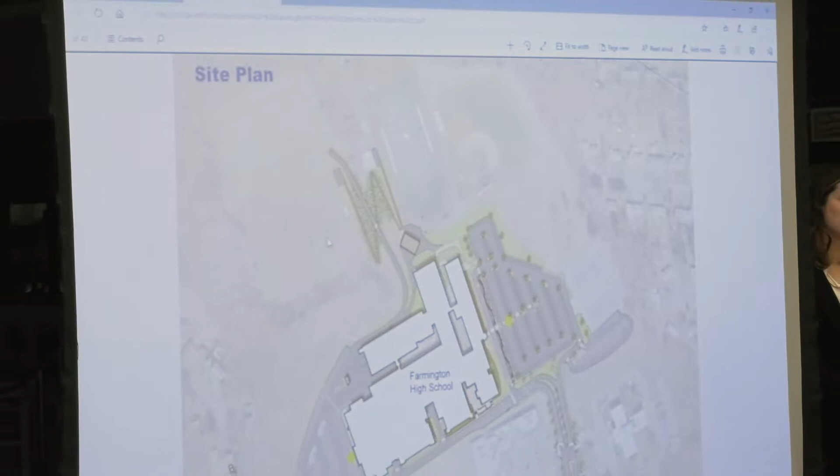So I'm going to go right into the solution. We're going to walk you through the building as we see it being resolved, and then we'll go into the criteria. Just to give everybody a sense of orientation, Route 4 is down here, Monteith Drive. This is the main parking lot, the southeast corner of the building, and that's really the parent entrance right there.

So in our option here, what we did is we said, well, one of the key factors in this design is going to be safety and security.

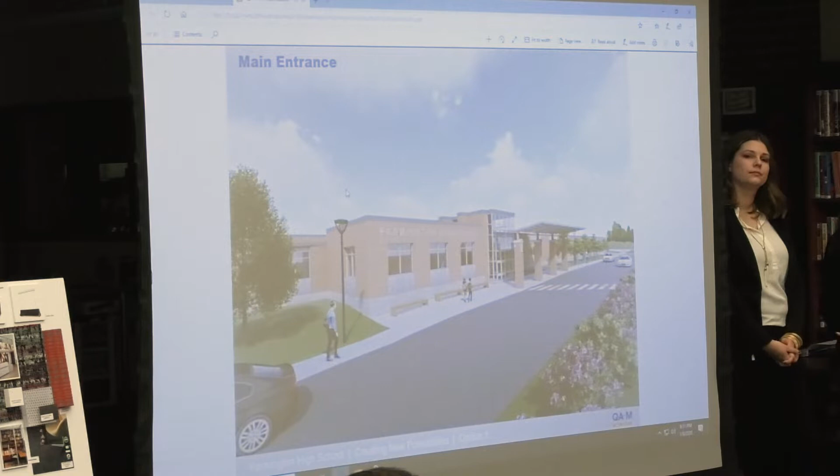Our first move here is to take that entrance, which is a parent entrance, and really make that the main entrance to the school. What I mean by that is to really enhance that space, bring the administrative offices to the front of the building there. That's the new main entrance. There'll be a secure vestibule, so everybody will come through that vestibule, monitored by the administrators. There'll be sight lines to anybody coming and approaching the building. So that's the first solution for this particular project.

So as we looked at it, we said one of our priorities has to be circulation. What can we do to simplify circulation? In this approach of making the new main entrance right here, we also opened that space up in a way that allowed us to have a lobby, and the sight lines from that lobby would carry you through a very simple circulation path that helps with wayfinding throughout this building. More so for the community than the students, because the students learn the building. It's the community that's really the one that has to worry about where they're going.

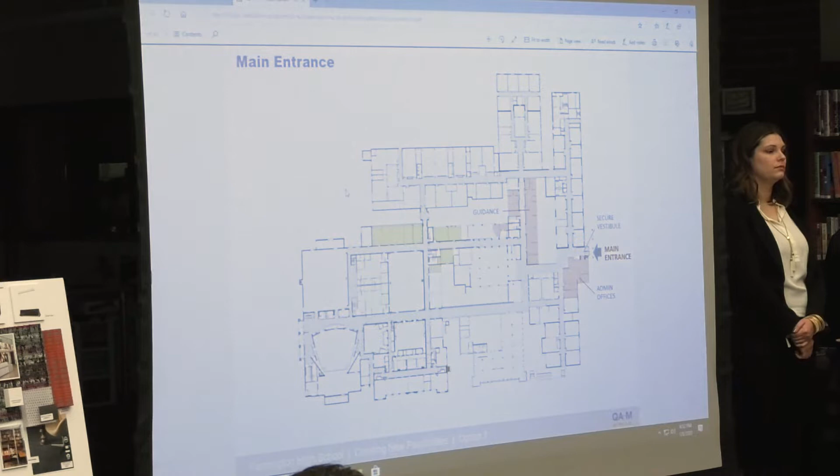So when you come in and enter the building, what you'll see from that lobby is a hallway, and where we're standing on the left side here is this space right now. Right in front of you will be the media center. So where do a lot of functions occur? In the media center. So it's important that right off from the front entrance, you look right into the media center.

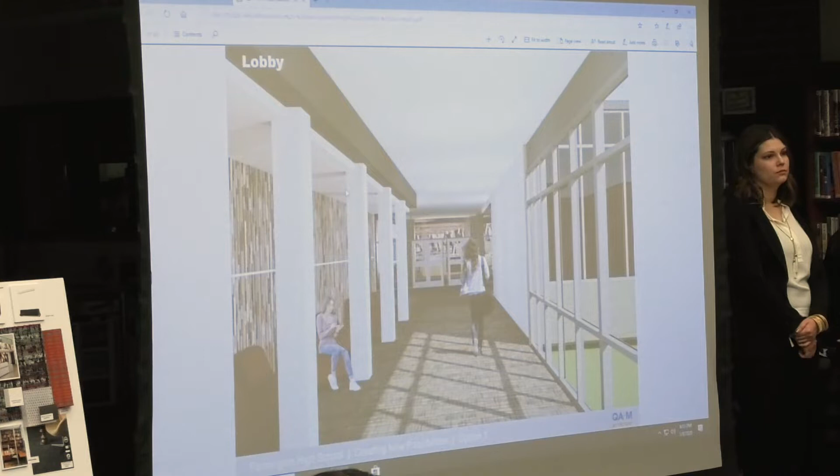Now, from a plan perspective, what you're seeing is we're standing here, looking out at the media center learning commons. One of the key criteria to this plan is addressing NEASC. And the reason I bring that up again and again is the four areas NEASC really cited us on: the adequacy of the cafeteria, the adequacy of the learning commons space, safety and security, and adequacy of science.

So what we've done in this solution is come up with a way of building a cafeteria in this courtyard, the circular drive, converting the cafeteria to the media center learning commons, and then there'll be a snowball effect of how it improves space throughout the building.

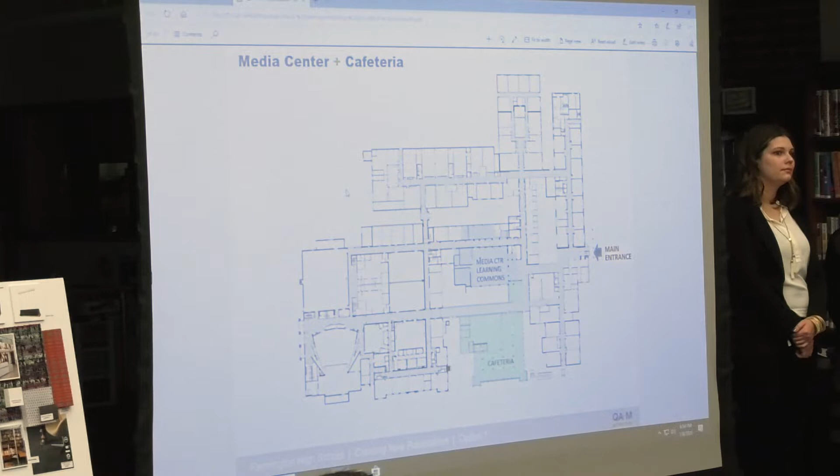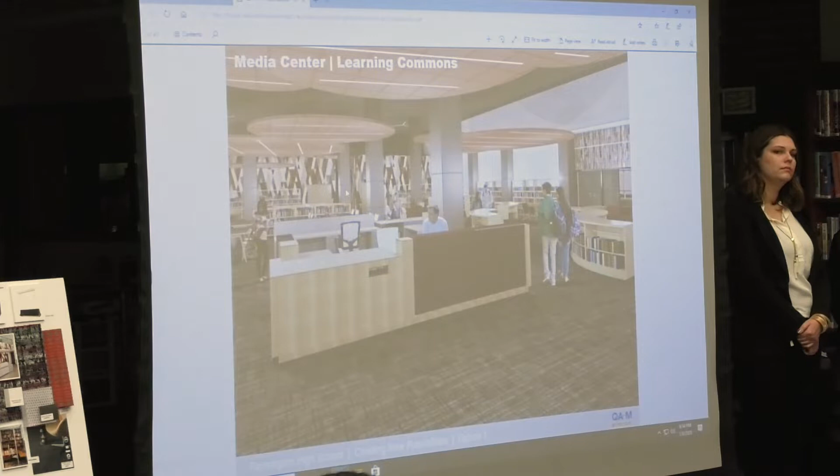Adjacent to the learning commons is the cafeteria, and the cafeteria is a space with lots of natural light. Again, it's another space that students, parents and the community can use. So it's important to have this space.

Another aspect of this particular design is that right adjacent to the cafeteria is a courtyard. So if you envision that that's the circular drive right here, that's where the cafeteria is, and this becomes an outdoor space. Typically in the summer or in the spring and fall, students are out there, so it's really an extension of the cafeteria.

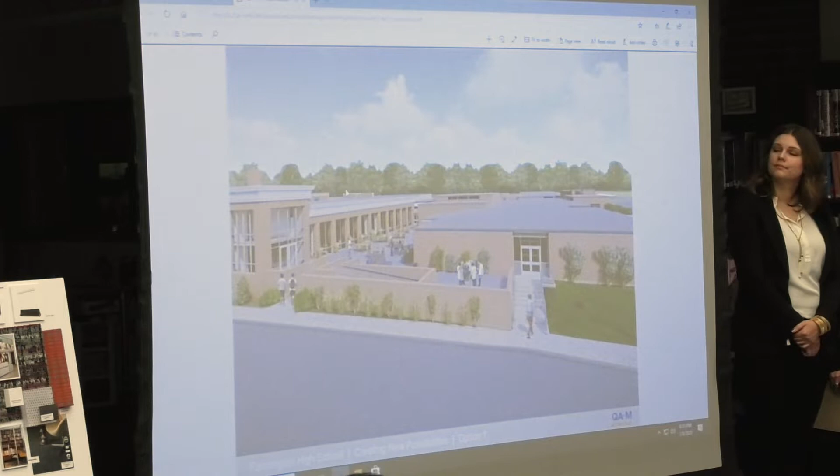And what we're doing in this process is solving a problem that says, by building one cafeteria space, we can now repurpose so many other spaces within the building to meet all our other needs, in terms of making the building fully accessible, compliant with educational needs, and so on.

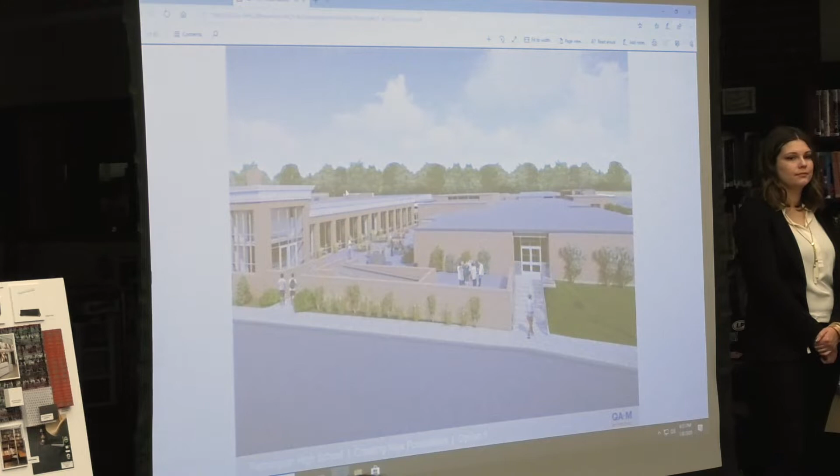So what you see here, and what I was pointing to, here's the media center. This is actually sort of a cyber cafe space, an interspace between the media center and the cafeteria. And this hallway right here is a new hallway that becomes the connector to what's existing as the main entrance right there, because you can see here's the auditorium, the gymnasium, and that becomes the main connection point right here.

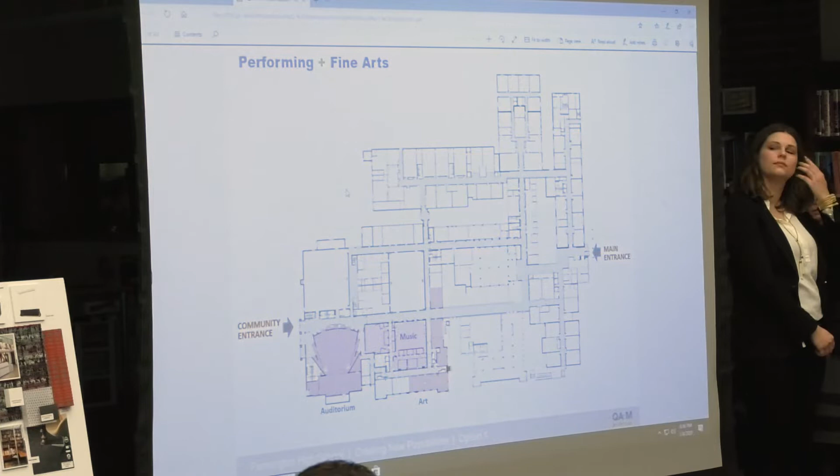So from a circulation point of view, you come into the building, one turn, and now you're right there, down Main Street, where you've got all these spaces functioning right off of that area. The other thing it does is, students cut across to get to their art classrooms, for instance, which are on the 3rd floor. They're coming all the way from the 900 wing trying to get there in that short amount of time, so they cut across. That's a security issue with students coming out. So this solution also allows for an internal connection for all students to move throughout the building.

As you go down this Main Street, you'll see there's music, there's the auditorium. One of the changes we made is we put art on the 1st floor. Looking at this building, with all the work needed to be code compliant, we're going to be repurposing spaces, and in that process we've got to reconfigure the building. By bringing art down to the 1st floor, we've shortened the distance people have to travel. Art is functioning right there, and now it becomes really part of all these core facilities, part of the music and the cafeteria, the spaces students go to quite frequently.

Further down is music. The music spaces are made fully accessible so that the depression, the pit for the band room, will be filled in. The idea is to make all of these spaces fully accessible. And then finally we end up at the auditorium. The auditorium has its own special issues - we all know about the capacity, the accessibility, the acoustics.

Our approach in this option takes the auditorium and renovates it entirely in its existing space. When I mean renovate, we're not keeping any wall. What we did is an analysis of the structure - the walls don't need to be, they're not load-bearing, in other words. So we can remove all the structure and create an auditorium that's appropriately designed as a theater space, a venue for performances, and certainly make it fully accessible.

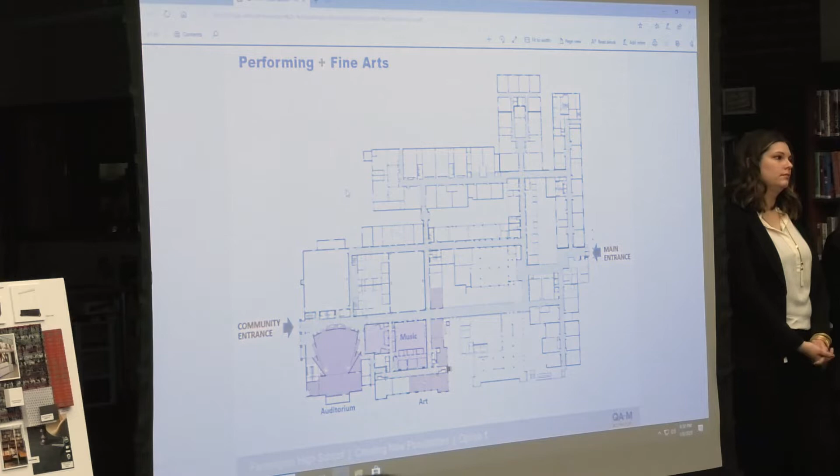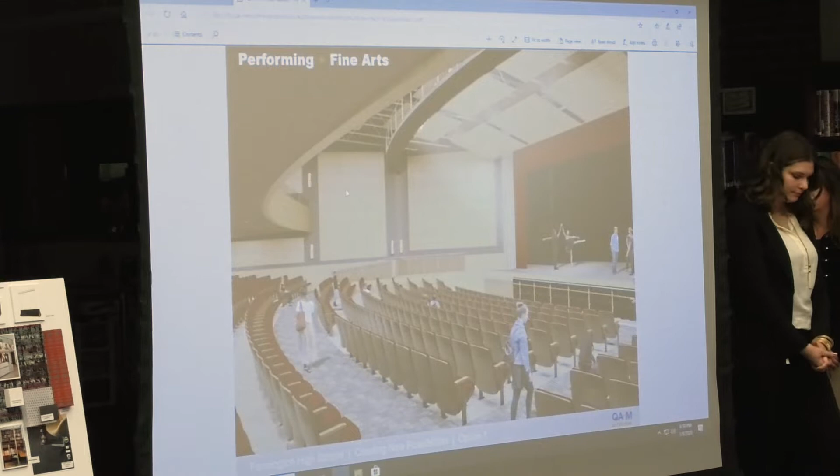And finally, the educational component of the building. One of the requirements, or one of the desires, was to have learning communities. What we did, when we moved the media center, that space was repurposed, which gave us the opportunity to create a learning community in this area right here. A learning community consists of classrooms, breakout rooms, teacher workrooms, science labs - and that's important because science is one of the areas we've been cited by NEASC. So by relocating science throughout the building and meeting that criteria of learning communities, we're now able to also address the issue of science.

So in this solution, you have 4 learning communities here. And I mentioned earlier how we relocated art, but there's a purpose to that - it also allowed us to create 2 learning communities on the 2nd and 3rd floor of the 1928 building. That's critical because one of our big issues in this school is how do you get from one point to the other, and how do you get through the throng of students that's all over the place? Everybody seems to be coming to that intersection right there, and it makes it almost impossible to navigate.

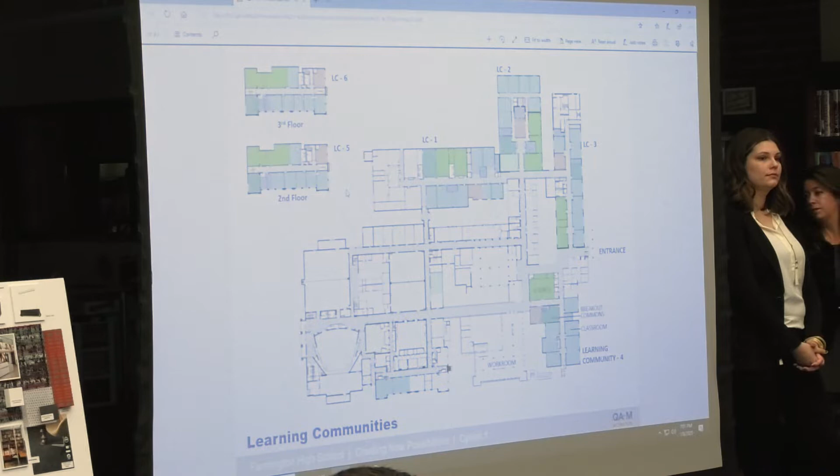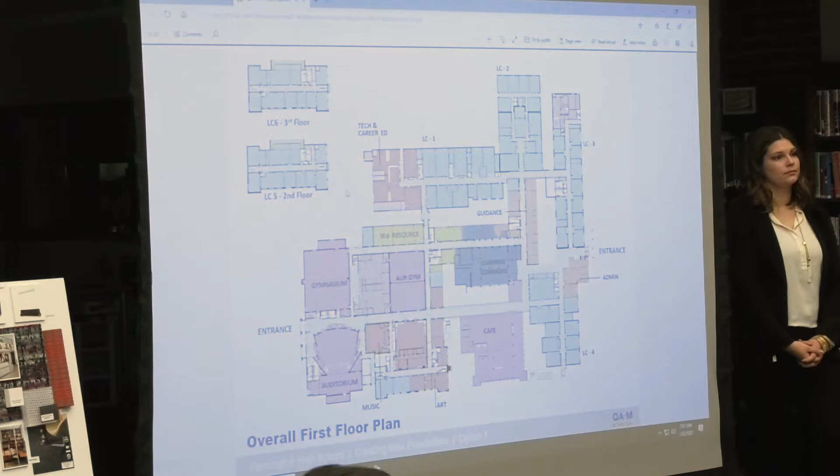So finally, just giving you an overview, here's the main entrance. We address security at this point, and we simplify the circulation—you can see it's a straight shot right there. We've added the cafeteria to address the NEASC concerns, same thing with the learning commons. We've addressed the educational spaces, provided a new auditorium, refurbished the gymnasium and the auxiliary gym, and the locker rooms get fully renovated as well to make them fully ADA compliant and Title IX compliant.

So that's really a summary of our design. My name's Angela Cahill. I'm the project manager for QA+M Architecture.

Here you see an image of that cafeteria that was built in infill of your existing circular drive courtyard. You see it adjacent to the 1928 building. As far as the style goes, we're renovating your existing building in this option. We're looking for something that is sympathetic to the existing building, both the 1928 building portion and all the other portions that have been built over time. So you can see the style that we chose here—it's updated, but yet it correlates to the 1928 building.

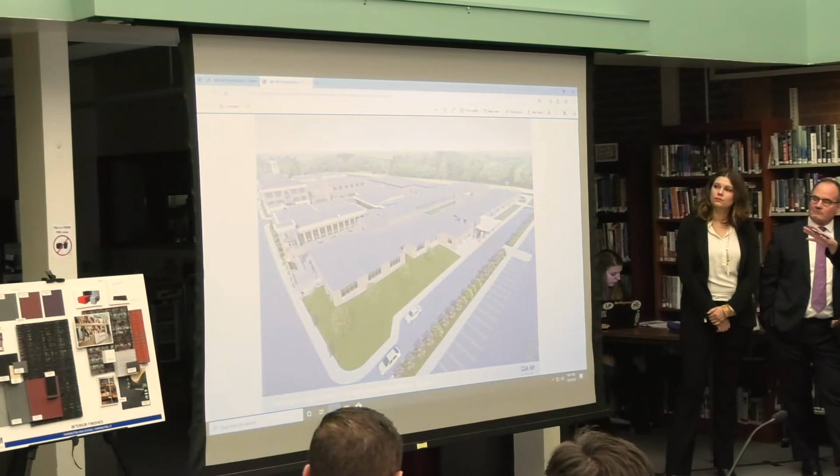The next image shows overall a model that we developed, and you can see the entrance area that we renovated on to become the main entrance on the right, and then again that cafeteria piece that'll get inset into your courtyard. So we're really proud of all 3 options that we've developed. We're done with the design of all 3, and you'll see them all this week, next week, and the week after. This particular one sort of surprised us.

And we're going to present now the second half of our presentation, which are the criteria slides. This is to enable you to really understand how we have met the charge that was in the RFP. Really, we feel we fully met all of the criteria in your matrix, all the categories of your matrix, with the exception of those that you told us to specifically exclude. So we surprised ourselves a little, and we're really proud of that.

And then in the following weeks, you'll get to see how our other options pan out. So I'll start with matrix 1, and then Rusty and Dave are going to talk about the rest.

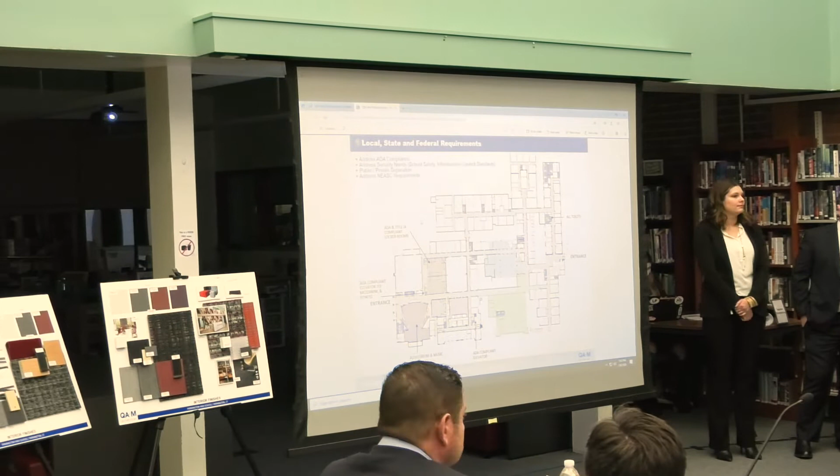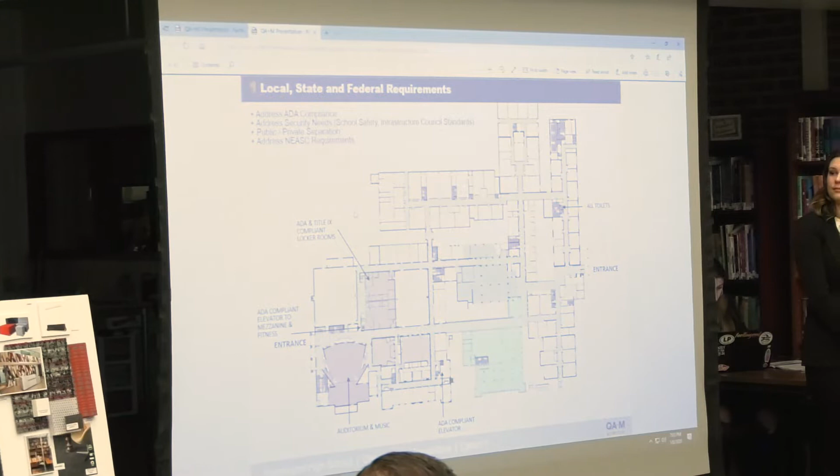On each of these criteria slides, you'll see the matrix, the criteria number at the top, and then you'll see all your subcategories either right below that or in the lower left corner. So these 4 subcategories address ADA compliance, security needs, the School Safety Infrastructure Council standards, and the public-private separation and the NEASC. Those were all within your criteria 1. So each of the criteria slides will have those listed for you.

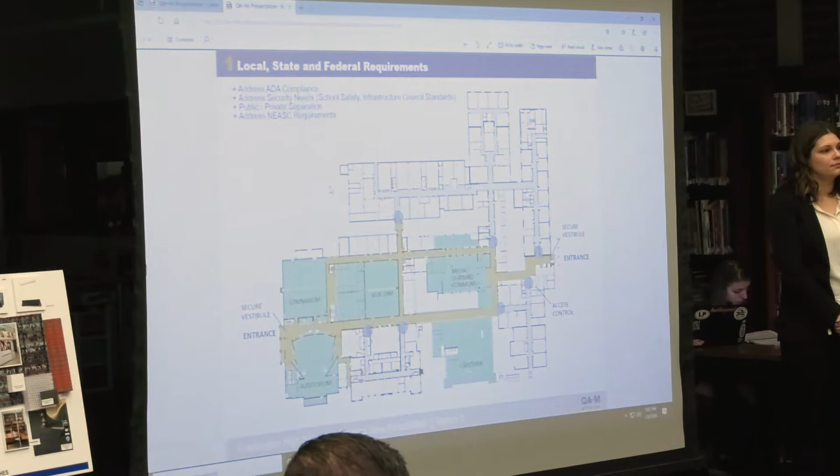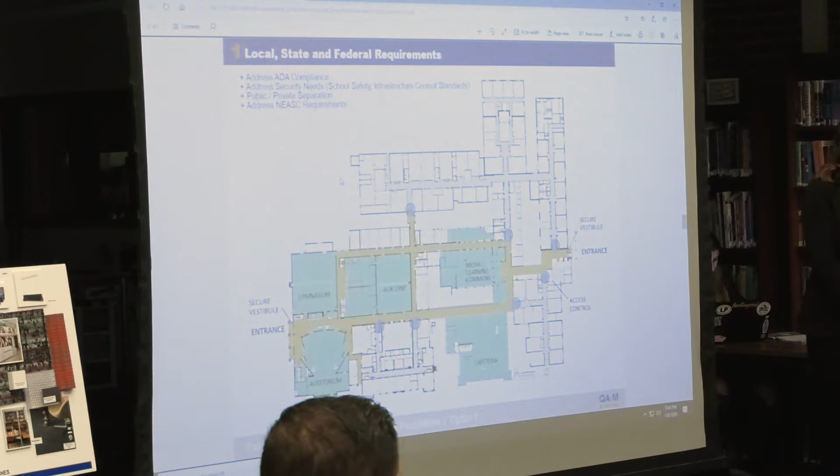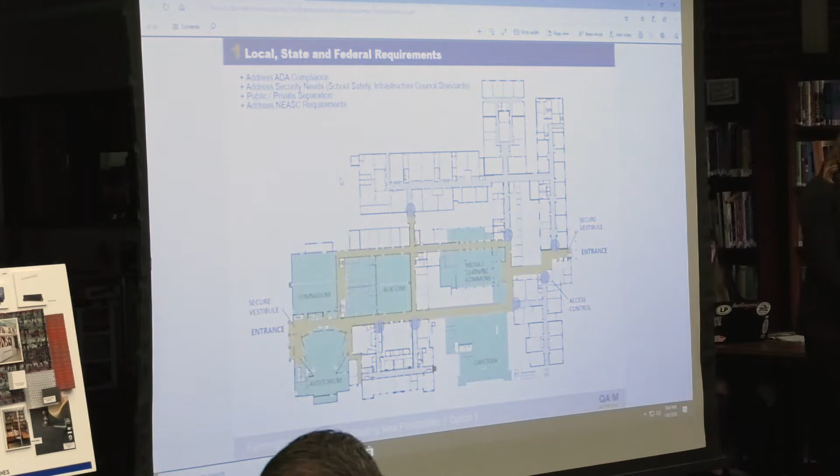So just speaking, we addressed most of these already in the design presentation, but I'll just touch lightly on the ADA compliance and the security. The previous slide had indicated where we were doing all of those upgrades, those code upgrades, sprinkled throughout. And this next slide talks about public-private separation in regards to security. So it's not just the main entrance and moving your office to the main entrance, it's also making sure that facility is secure not only during the day but after hours. The little blue circles indicate all the areas that we can provide lock-offs, so when you're using the facility after hours, you're really securing those learning communities from the public.

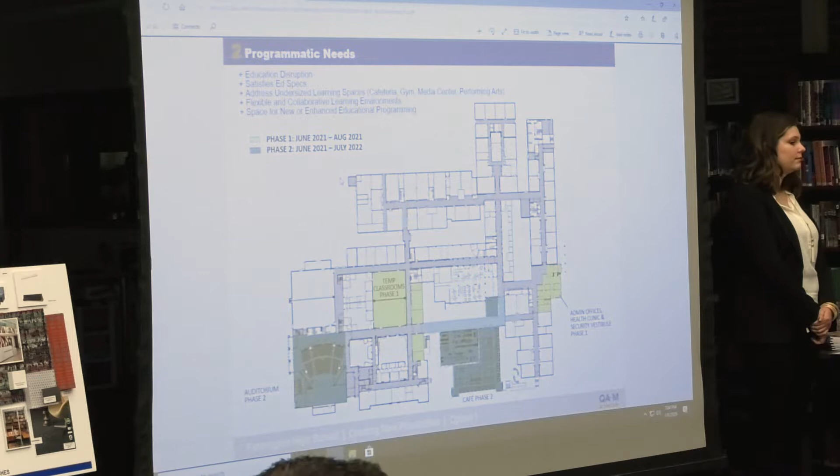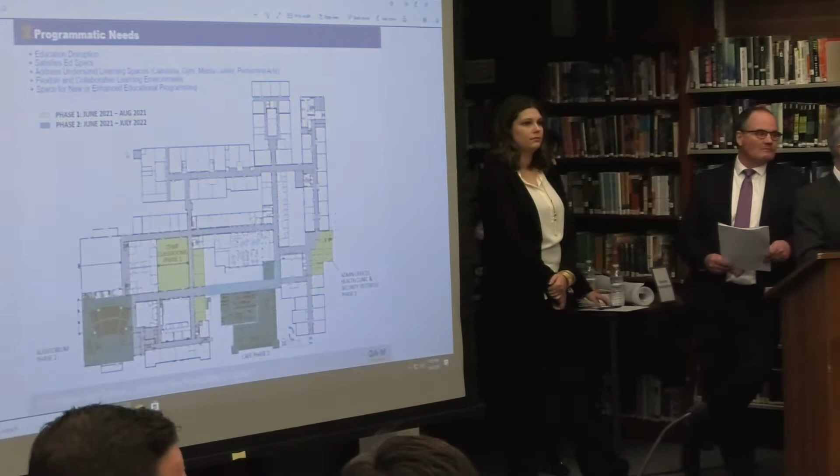One of the big challenges in this building is going to be, how are you going to build this? How are you going to go through this construction process? That's really a challenge in any building that's built while it's occupied, while construction is going on. We developed a fairly detailed phasing plan. We're not going to show you all the components of it, but needless to say, this was developed and we believe it can be improved upon, because when we develop a phasing plan, there's a lot of interaction with the administrators, with the parents, with the construction managers and so on. So we've gone through that process and we've created some spaces that are temporary classrooms within the building rather than bring portables on site. This has all been vetted and is actually part of the overall estimate as we look at it.

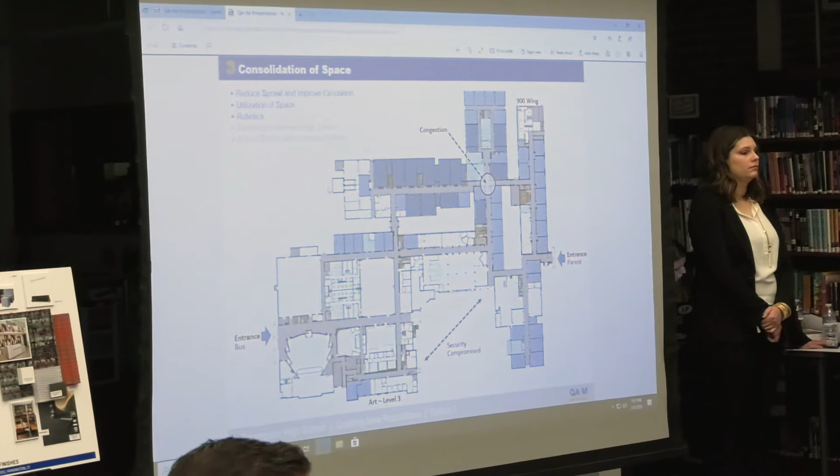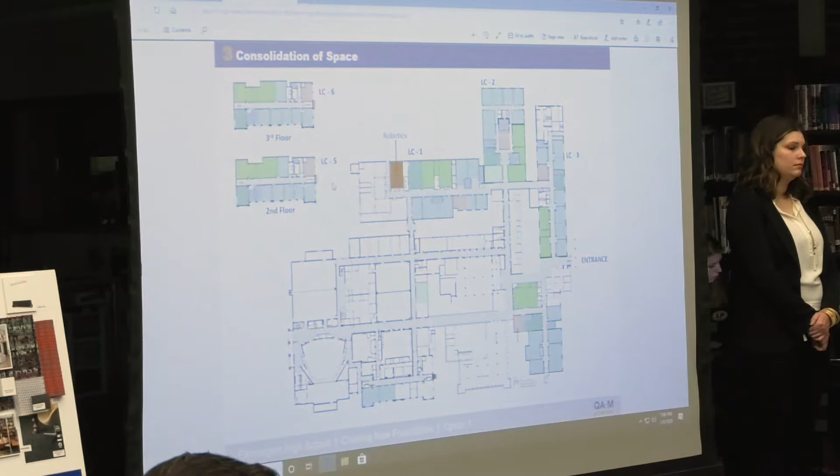The other thing we want to address is the issue of consolidation of space, which has two main components. One is how can we make the building address sprawl? Well, you can't address sprawl because your building is what your building is, but you now have 1,400 students in this building. What we can address, as I mentioned earlier, is how we control the congestion and circulation within the building. Taking the existing floor plan and how things operate right now, we mentioned students crossing the courtyard causing congestion, but by addressing it through the learning communities, we've repurposed spaces and created a traffic pattern that resolves those concerns.

David Quisenberry, principal of QA+M Architecture.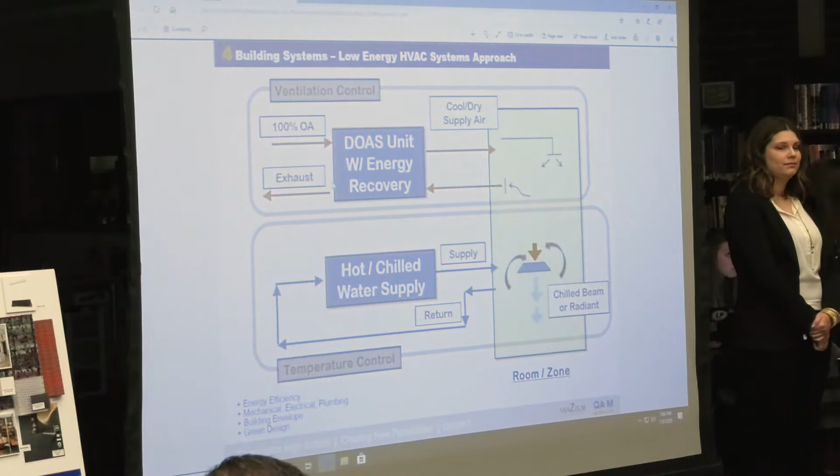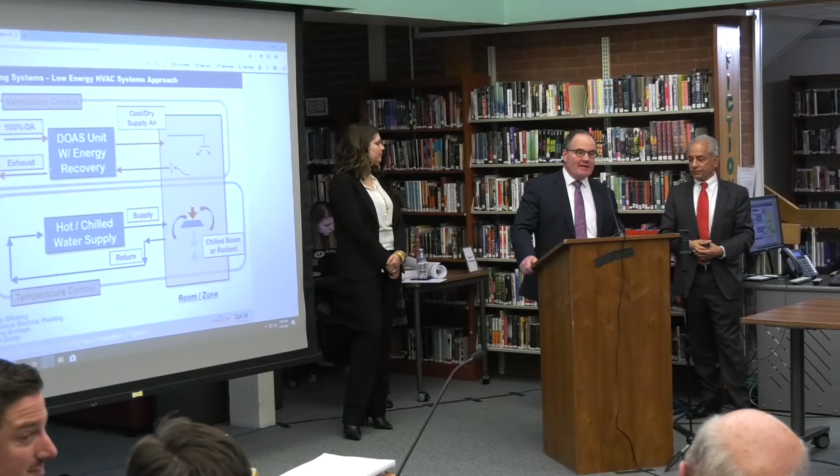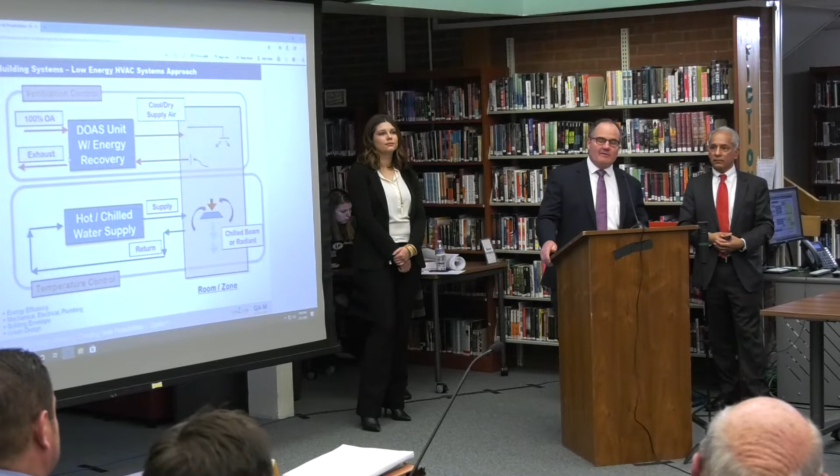One of the other big components of this is the upgrade of the systems within the school. We all know the age of this facility and how in need of improvements the actual components are. So as part of our team, Van Zelm Engineers, a local Farmington engineer, did extensive designs. I'd bore you all to death if I went through that tonight, so it's included at the end if you want to look at it. But we went through and completely redesigned all the systems in the school, taking into account the space available to install them, utilizing pipe systems versus duct systems so they could fit within the spaces we have. We'd end up with brand new systems to operate this school with fresh air ventilation, air conditioning throughout the entire facility, and high efficiency heating and cooling.

All the electrical and technology components, which have become obsolete through time, would be upgraded as part of this system. One of the things to keep in mind, as we've said, we love all three of our schemes, as I'm sure you do as well.

But relative to some of the things people talk about with green design and what's really good for the planet, one of the things about this initial scheme, what we call the maintain scheme, is that preserving a facility and finding a way to resurrect it for future use is actually one of the most green things we could do, rather than simply filling a landfill with the remains of this building.

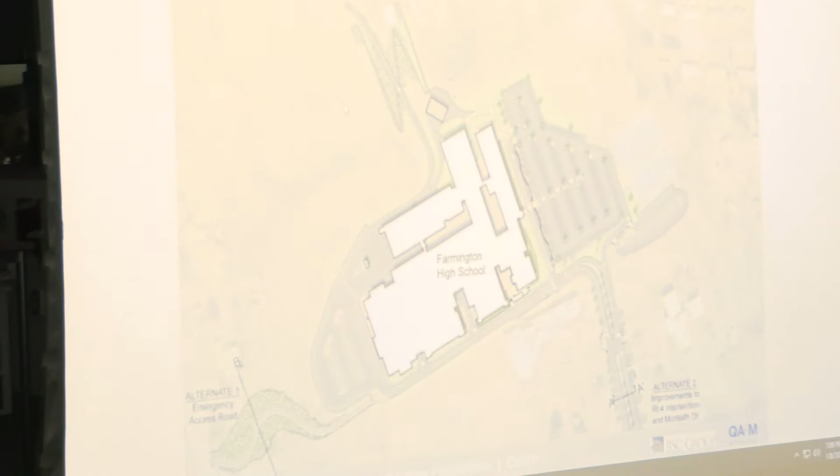Relative to improving the site, another one of your criteria, on the maintain option there's a limited amount of change we're talking about here. But one of the important things we had to address is ADA accessibility to the athletic fields. So there are some slight improvements to the athletic fields up on the hill between the upper lacrosse fields and the turf field track. Working with our landscape architect, we were able to develop a pathway system with a ramp appropriately sloped to provide an accessible route from the track level up to the upper field.

We also addressed some slight changes to the main parking lot to address safety, which was one of the main reasons to do that. As a parent whose daughter occasionally needs to be driven to school when she misses the bus, I'm familiar with how people actually cut through that parking lot instead of flowing around to the parent drop-off as they should.

Cars are constantly coming out, and you have a policeman stationed there to try to keep people from cutting through the parking lot. So what we've done is we've rotated all the parking aisles 90 degrees so that now the parent loop goes around the parking lot, and there's no opportunity to cut through it. When you come up, you follow the road.

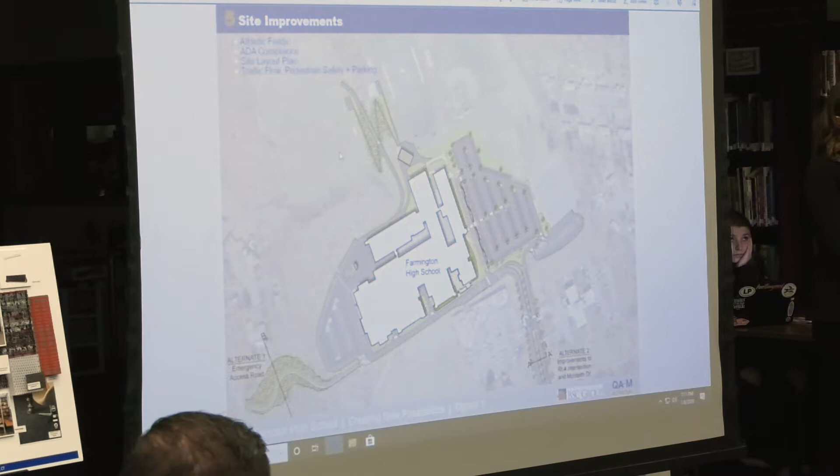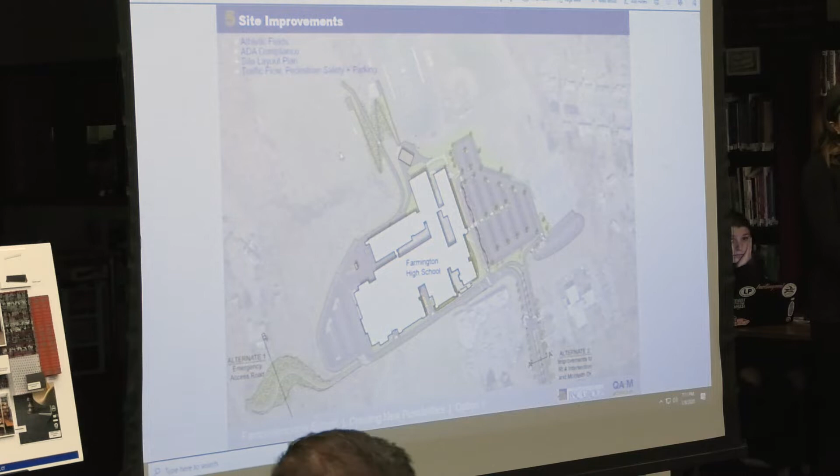The other issue is that right now there's a very unsafe situation where kids getting out of the parking lot randomly run across the parent drop-off roadway. By reorienting this way, and creating a landscape buffer, potentially with a small wall, between the drop-off aisle and the parking lot, we're collecting all the pedestrians out of the parking lot to a common pedestrian boulevard, aligned with the new main entrance to the school, having them cross safely at one location rather than crossing wherever they feel like.

As far as the benefits to the community, any project we do on this school isn't just for the students, and it certainly isn't just for the teachers and administration. It's for the entire community. We're all going to pay for this project, no matter which one we choose, so there has to be some sort of improvement for us as a community. In this case, even though this is the most basic scheme we're presenting in this series of presentations...

We feel that this scheme, developed on the maintain option, has thoroughly renovated and enhanced all the main public spaces. The auditorium will now be first-class, where we could hold music events beyond just student events, like the Farmington Valley Symphony Orchestra. The media center we're in now is tired and cramped; by addressing that, it becomes an easier to get to, much nicer, brighter space. The cafeteria isn't used just as a cafeteria, it's used for a lot of other community activities, and now it would also be a showcase space. Furthermore, the way we address circulation and lockdown makes it so much easier for this school to operate as a community facility during after-hours time.

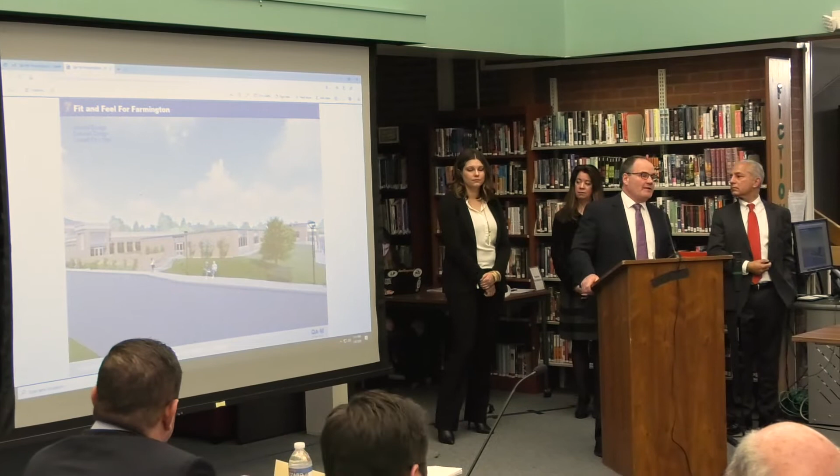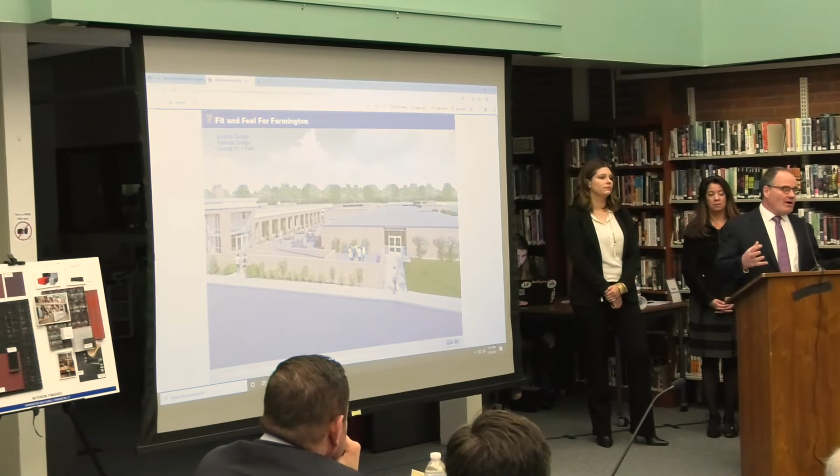As we discussed, this is a mild renovation to the outside. The only real addition is the entrance and the cafeteria, so we've designed that area to blend in with what's there. I know it's not exactly award-winning architecture that we're in right now, but the reality is we've chosen to create an addition which hopefully pulls some of the pieces together, and doesn't attempt to stand out as some kind of sore thumb.

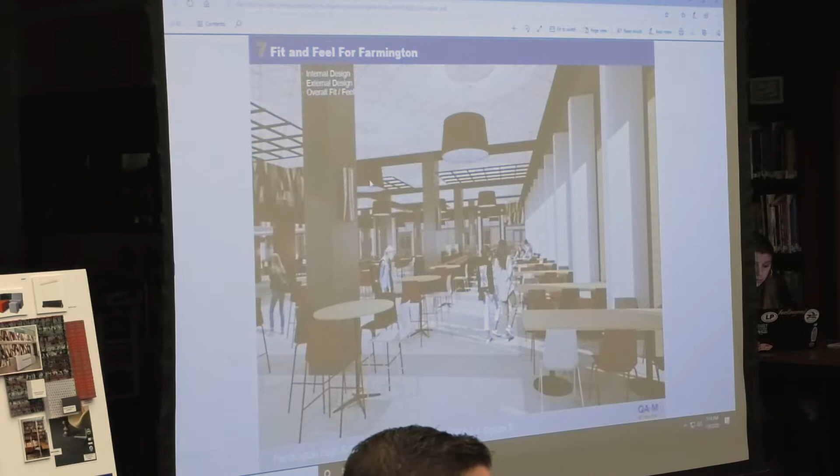All the spaces, we feel, are appropriate. They're modern, but not too bold that some people would find them offensive. Erica, one of the interior designers who worked for me, put together these finish boards that we're going to leave here for you to see, demonstrating the types of materials that would be in all the different spaces within the school, so you can see and touch them. You could actually come up and touch and see the finishes. Everything is labeled as to where it would go.

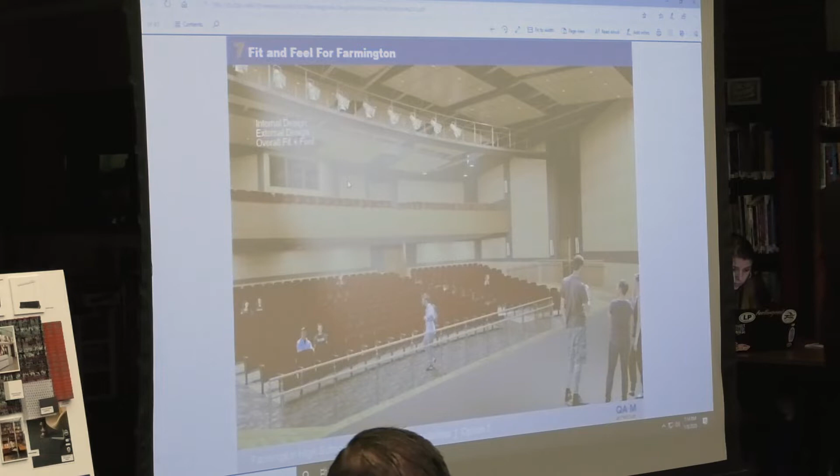With the auditorium, again, with a mezzanine, we can effectively accommodate the capacity we need, and it would be completely modern acoustically, with all its finishes. And then one final thing we threw in here, certainly wasn't something you necessarily were looking for, but based on our personal knowledge and experience with this facility, were some things we really felt should be addressed.

They could be addressed as part of this project. Quite honestly, we've met with the town, and they could address them independently of this project too, but it's basically related to access on and off this property. I spent a long time speaking with people from the Farmington Police Department, and they expressed a real concern with the way this property is set up with only one access point.

If a tree were to go down across Monteith Drive, everybody's trapped—either trapped off the property or trapped on the property, whatever. So there's a couple things that we addressed, just to throw them out there for ideas.

One of the things we addressed, and did a lot of research on to determine it's feasible, is that the town of Farmington owns the land between the auditorium parking lot and Highwood Drive. There's a section of land there between the houses on the lower section and the houses in the neighborhood above. That land is town land, it's available.

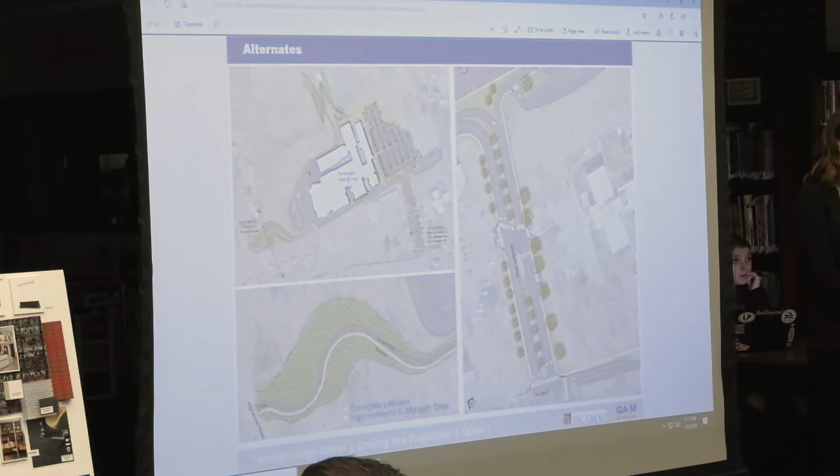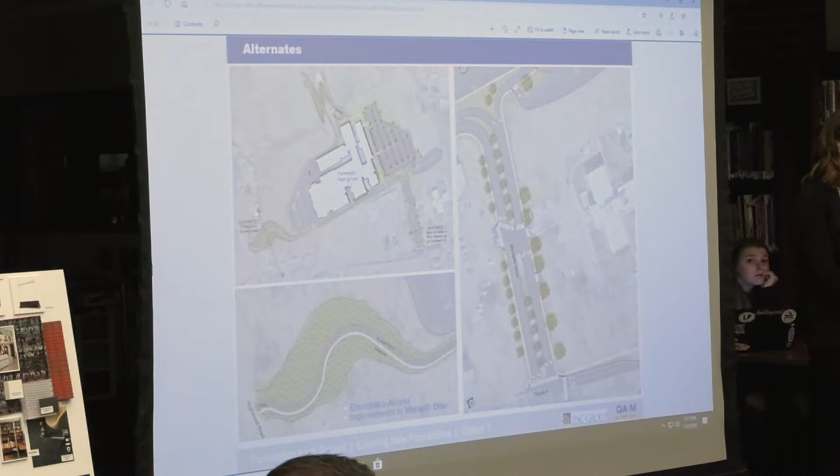These are things the town could address at any time. We feel it's prudent, if you're going to do a major high school project—whichever scheme you choose—something like this would be worth doing at that time. They're priced separately when CSG goes over the prices, because it's not in any way necessary for any of these schemes.

We just feel it's something that should be discussed by the town and the committee as to whether they make these improvements. The budget that you'll present will include these improvements, so it's more of a deduct if you decide not to do them. The Monteith Drive improvements are roughly estimated at about $1 million, and the access road at about $500,000. So they're not inexpensive solutions, but they're lasting solutions that could really enhance the site.

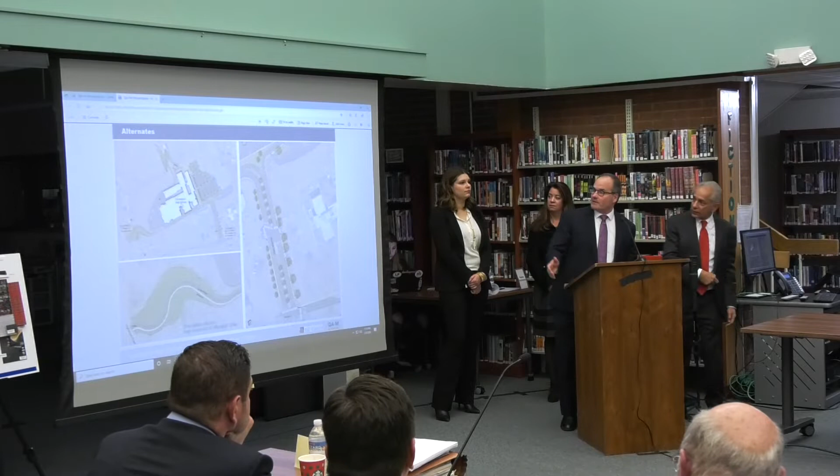So finally, in closing our presentation here, basically to sum up, one of the things we looked at was the official title of this option—option 1—which is to maintain the existing high school. The intent of that title means we have to work with what's here. But nobody would maintain a building that was failing so badly as this facility is. So what we viewed it as is working with the existing building, working with everything we can, but really reinvigorating this high school.

It's not a maintenance option. If the choice at the end of this month, of all the 6 options you see, is to go with our option 1, that option has to last you for decades. It's not a solution you can choose if you don't think it solves your problems. So we really take it very seriously that this is a reimagining of this facility. As far as our solution, we feel we've really gone through and pretty much accomplished what could be accomplished with this facility and the minor additions we've added onto the building.

So in that sense, we feel that it's a very efficient solution, utilizing everything that we could utilize. It's an effective solution in that it does solve as much as we can solve.

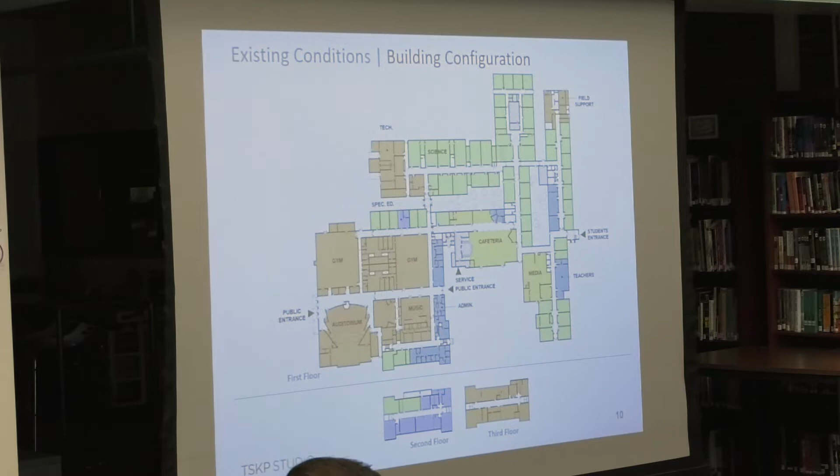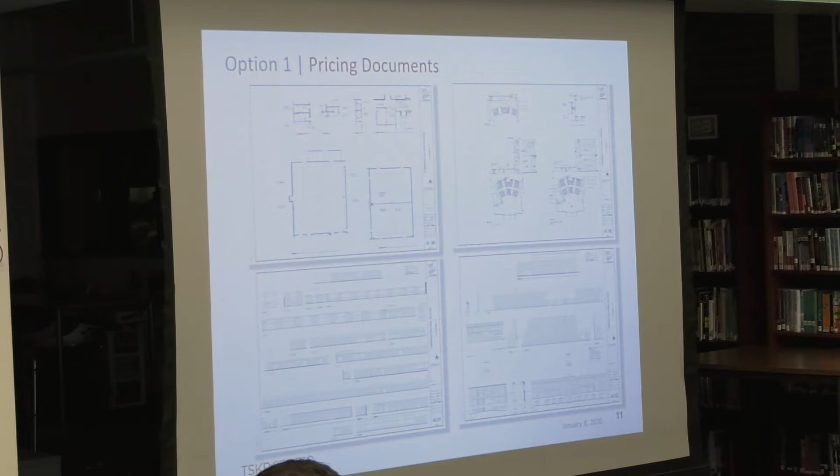We prepared drawings that looked like this, illustrating exterior elevations and floor plans. Those were sent to the cost estimator, accompanied by narratives that describe very carefully what you're demolishing in each component of the building and what we're building back, the framing, partitions, thermal moisture, doors and windows, and so on, all very carefully described.

And the cost estimator came back with a very detailed cost estimate that was broken down into various components. This is a typical way a cost estimator will do it. He broke it down by trade - so much for concrete, so much for steel, so much for mechanical systems, and so on.

I find that kind of information very difficult to convey to a building committee or to members of the public as to where the money is really going. How do you understand this? So what I decided to do is take that total and break it down differently.

I'm disclosing what CSG is going to present later. They're going to say, this is the total of our project, our option - it's only $49.9 million, what a bargain. Okay, but let's really look under the hood and see what's really in this $49.9 million.

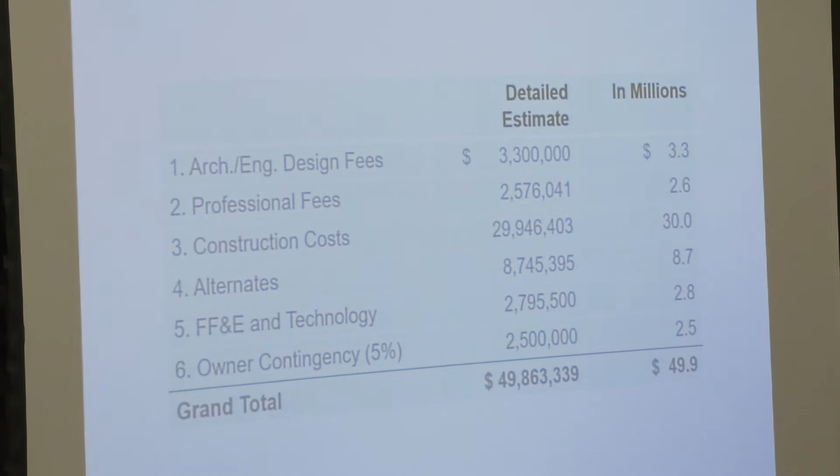What we did is look at your statement of needs, which broke it down into these requirements. This should be familiar to the committee. It may not be that familiar to members of the public, although it's available on your website - they should have become familiar with it.

We know that you were cited for accessibility and accreditation by NEASC. We know that you have security compliance issues that you need to address. We know that you have a sprawling issue that you need to address, that you have an educational program requirement, and that you have building envelope, energy, and code compliance issues from an energy conservation standpoint.

I spent no money on fixing the sprawling layout - I can't in this building. $11.1 million is spent on educational programming, trying to satisfy some needs, but it's only in certain selected areas, not the whole building. And then $26.4 million on energy and mechanical systems.

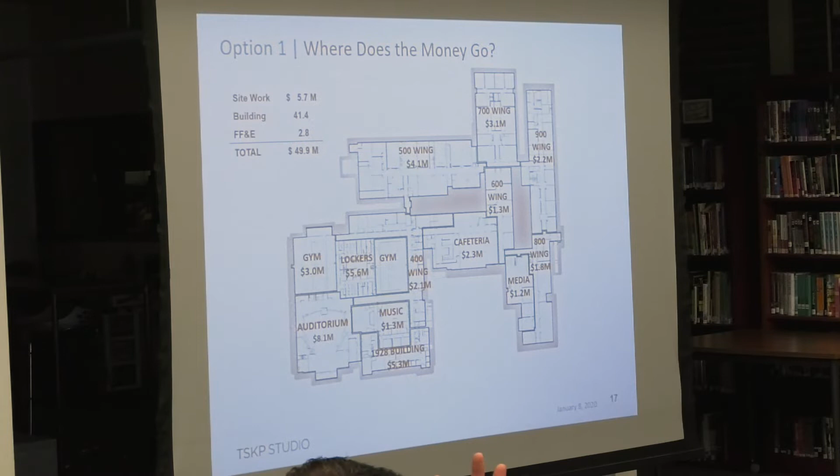Now, I know you prepared a score sheet using your statement of needs, and you categorized it here in 1, 2, 3, 4, and you created 5, 6, 7, and 8. So in addition to these 4, you added site improvements, benefits to the community, fit and feel for Farmington, and cost. So I know you have this score sheet that you're going to be scoring.

To help me make this presentation, I really stuck my neck out, and I said I'm going to fill out this score sheet. Now, this is my opinion, okay? You have a number of committee members who will have their own opinion, who will do their own scoring, but it helps me organize our presentation this evening. So let's do this one step at a time.

The first is meeting local, state, and federal requirements. We meet all of those requirements. We meet ADA requirements. We meet the NEASC requirements. And so in my opinion, we believe that this should be a 4. There isn't anything that we have left out as far as the ADA is concerned. And you may recall that I said we're spending

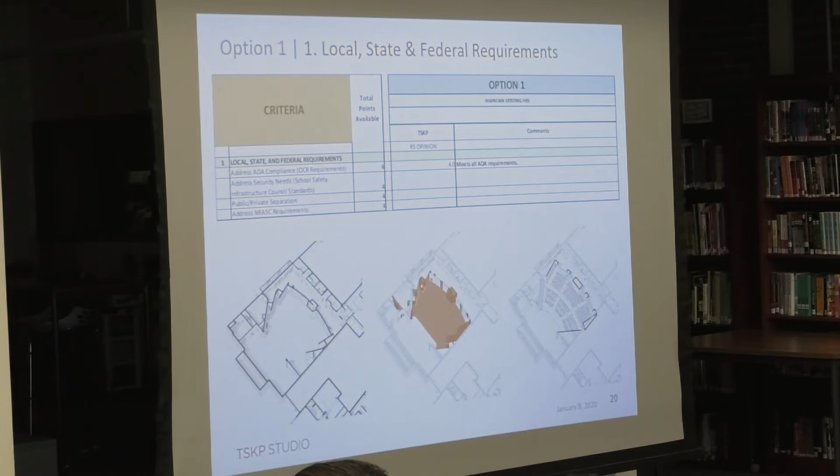$4.3 million doing that. The second line item is addressing security needs.

And we do address all the security needs. We are creating a Sally Port, new entryway, a secure way that has bullet-resistant glazing. We're adding impact-resistant film to all of the windows on the exterior of the building. We're adding security systems at each and every location. You have a lot of exterior door locations, so we're adding money to make those doors monitored, centrally monitored, and we're spending over $8 million, a little over $8 million, meeting those kinds of security requirements. We're also doing work on the site to improve security there, and Michael will walk us through the site features.

Public-private separation. There's very little that we can do about that. We have the existing footprint here shown on the bottom. You have public areas here that are shown in yellow. Those are embedded within the footprint of the building. So to get to those public spaces, you have to go through the building, through the school facility to do that. So I scored it a 2, no change. You may score differently. I label this my opinion, RS opinion. So that's my score, but you may do it differently.

And then the last item in this first section is addresses NEASC requirements. I gave that a 4 because we fully address all of those.

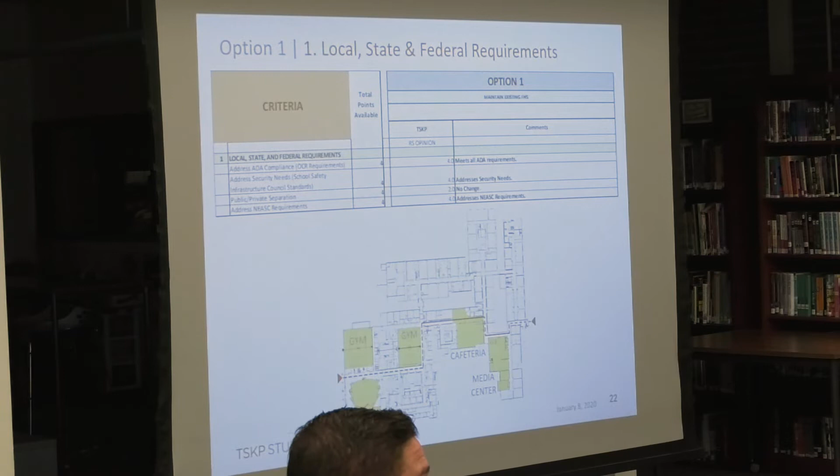Okay, programmatic needs, starting first with education disruption. Now, we did do an analysis of the construction duration that it would take to do this project, and we are estimating the construction duration to be 27 months. We would need 3 summers to accomplish this work. So the first summer would be in the year 2022, after roughly a year of planning the project, after approval by the town for funding, of course. And then starting in the summer of 2022, continuing through the academic years until the completion in 2024.

And a lot of the estimating that was done by the construction folks targeted the midpoint of construction, which is approximately here, the midpoint of 2023, as the number that is the escalation number. So, and that's pretty traditional in cost estimating for construction. You escalate today's budget, today's costs, to the midpoint of construction. So that's built in to these numbers already.

I gave this a 1. Of all the three options we're going to be looking at, this one is the most disruptive because you're hopscotching around the footprint, you're moving pupils out of the way, you're creating swing space outside the footprint of the building, and then all of that shuffling around makes this the most disruptive.

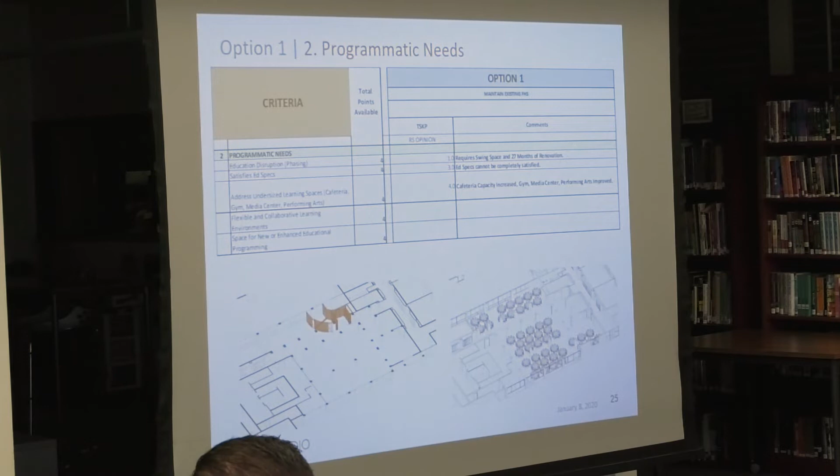The gym, media center, and performing arts are going to be improved. Michael will talk a little bit about that later, but I do think in that particular line item we should score a 4.

The other 2 items we don't score very well at all. We don't create flexible and collaborative learning environments. We're not repartitioning the building or changing the sizes of the classrooms, and we're not creating new or enhanced educational programming space. I sat in on a presentation with educators showing wonderful pictures of collaborative workspaces, project areas, those kinds of unique collaborative spaces. That's not being done in this $49.9 million job.

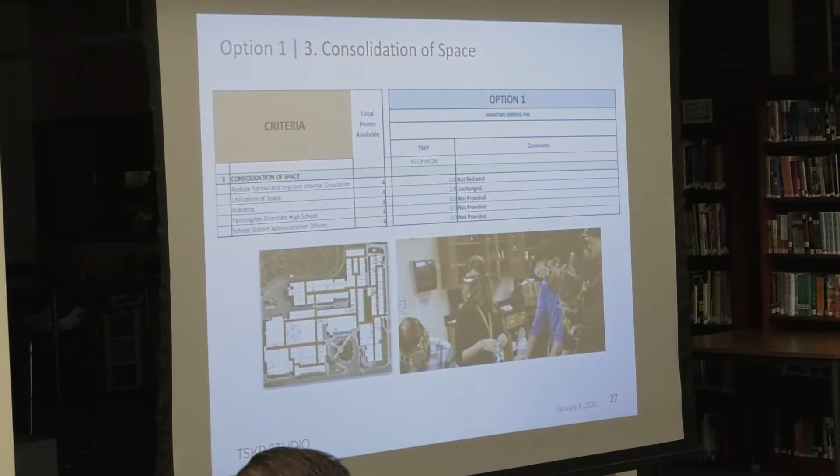Next category, consolidation of spaces. Well, these all get zeros except for line item 2, utilization of space. I gave that a 2. It's not ideal—probably the best utilization of space is in the other options you will see. I think this is a very inefficient utilization of space. There's a lot of circulation area, and it's difficult to change, quite frankly, in a maintain option. Again, strictly maintain.

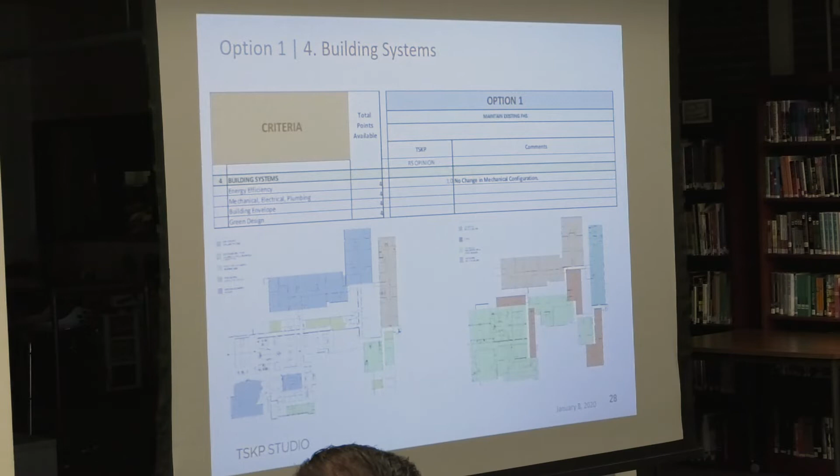Building systems. We spent a lot of time examining your mechanical and electrical systems, and our engineers identified the different heating systems you have—these heating areas are done by different boilers. You have a total of, I think, 3 boilers, 3 boiler rooms. We're not replacing all of them because the most recent one can be reused. So mechanical system-wise, this is all replacement of equipment in kind. Anything we felt still had 15 to 20 years of life in it, we maintained, and we'll show that as the deferred cost, escalated out. But we're not bringing these up to current fresh air standards or energy efficiency. They are better systems, but they're on the backbone of your current distribution, okay?

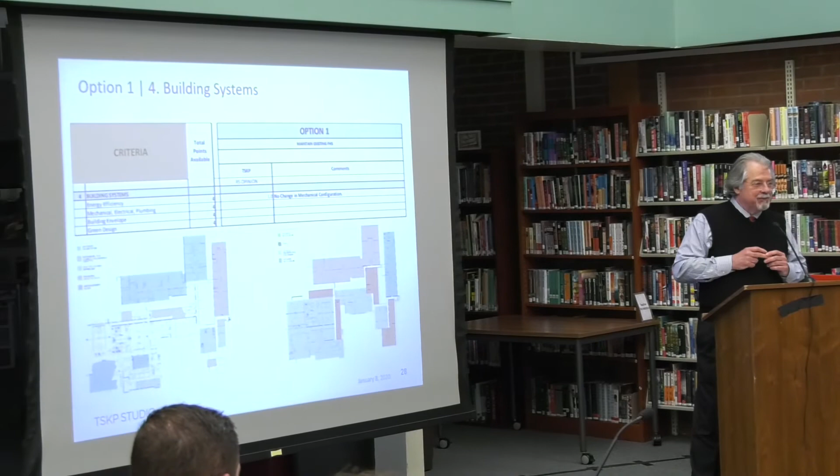Yeah, we should clarify that too—we're not changing the engine in your car, we're rebuilding the engine that you have. Think of your mechanical systems as the plants that make heat and the plants that make chilled media, whether it's air or water. Then you have the distribution system and the delivery system within the spaces. We're not changing the distribution system; we're changing the basic mechanical units, whether it's rooftop equipment or boilers. So I gave this a 1.

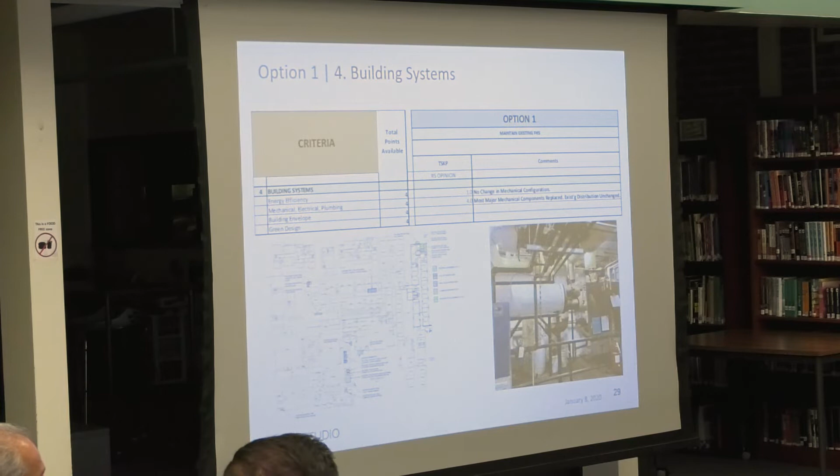This diagram was prepared by our engineers. It shows the locations of boiler equipment, with a photograph of some of the major mechanical equipment. Those components that should be replaced are being replaced as part of this budget. I gave that a 1. Most major mechanical components are replaced, but the existing distribution remains unchanged. The same is true for rooftop equipment—you have a lot of rooftop equipment on the roof that will have to be replaced, and it should be timed with the roof replacement, so that's built into the budget.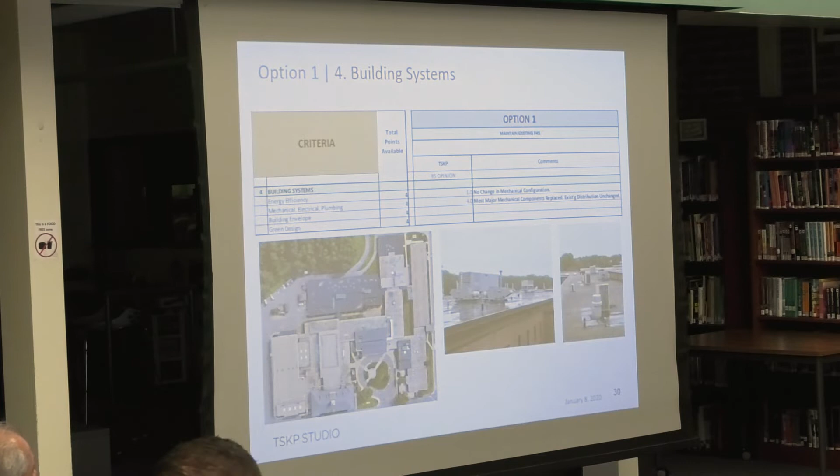The next category is building envelope. We examined the vintage of each of the roofs in your building and did a chart showing the square footage for each vintage. We did not replace the roofs that are only a year or 5 years old—we only replaced the older ones. Roughly 16,000 square feet of roof is not being done as part of this option, though that is a deferred cost we identified later. However, in addition to roof membrane replacement where we are doing that, we're adding insulation at those roofs, so we're improving the insulation in those areas.

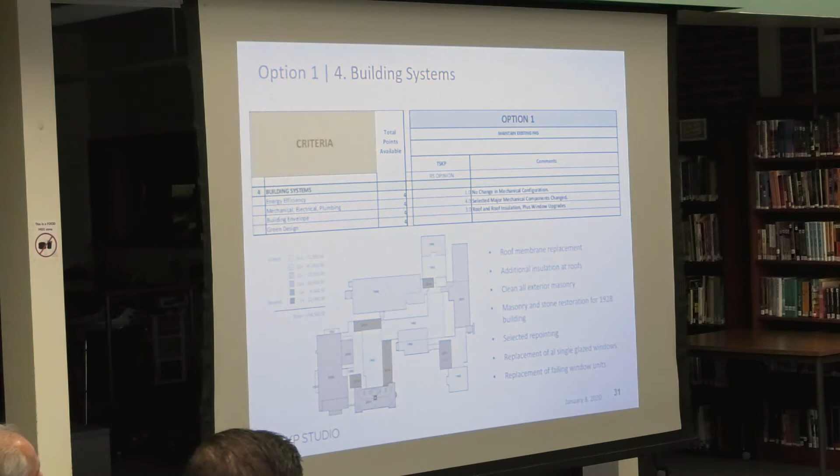We're cleaning all the exterior masonry, doing all the masonry and stone restoration for the 1928 building, and some repointing. We're replacing all of the single-glazed windows with thermopane windows and replacing all of the failing window units—those are in the media center and the 1928 building.

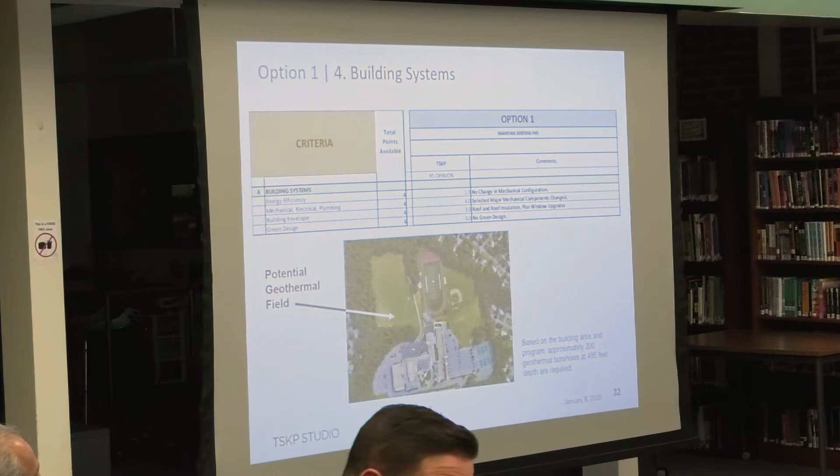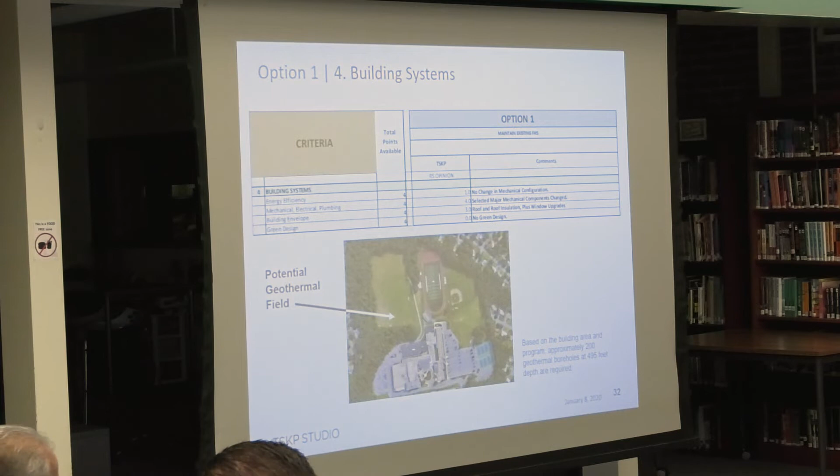We looked at what it would take to add geothermal fields to this building or site, and we know we would need roughly 200 geothermal wells, 495 feet deep. That is not in the $49.9 million budget—those are add-ons we'll be reporting in the other two options. We also looked at photovoltaics. We know how many photovoltaic panels would be required to provide the electricity for this plant. You would have to select certain areas of the roof and also create carport structures to fit the number of panels needed. But again, that's not in this budget. So under green design, this is that line item—I gave that a 0.

Site work. Okay, so I'm going to ask Michael to walk us through the site because a fair amount of money is spent on the site.

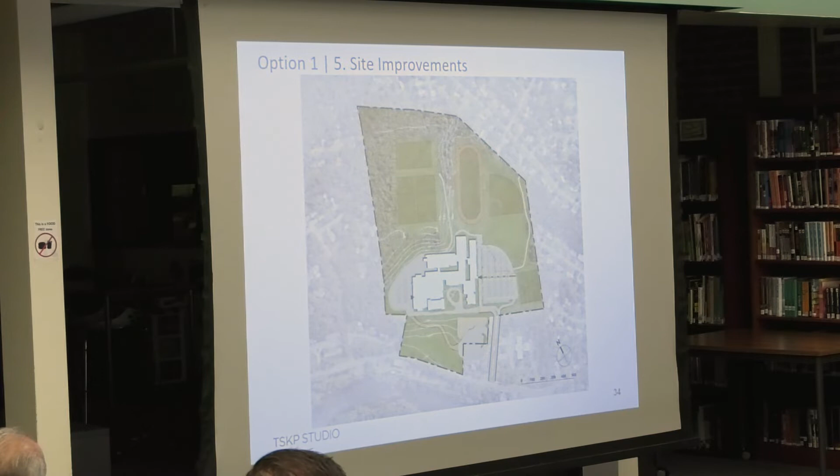It's about $3.5 million. Thank you. Very good.

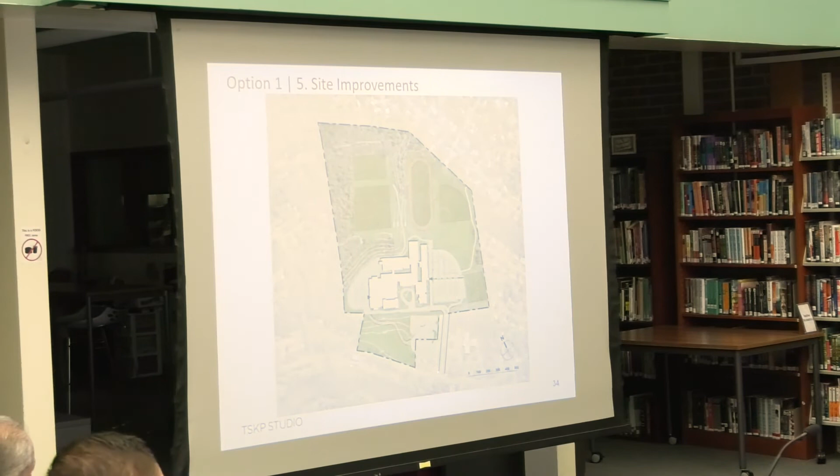So a lot of this is going to sound similar. There's improvements to Monteith, both the ingress and egress, not only making those both truly two lanes each, but also fortifying the shoulder with a real pedestrian sidewalk that could be mounted by emergency vehicles if need be. So this is a safety and circulation issue, continuing all the way up to the front door of the building. Similar to the other scheme, the main parking lot has been rotated 90 degrees for all the good reasons that you heard.

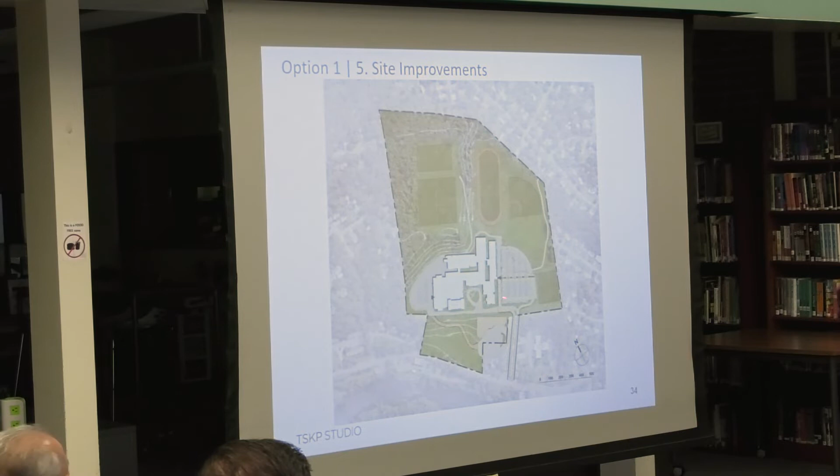This is a bit of social programming to get students and even grown-up folks to follow the circulation line to this large pedestrian-friendly entryway that goes from the fields over to the main entrance. And you know, this is just good airport design, right? Gather all the people and bring them in all at once. So that is a safety issue as well.

As part of fixing this loop, as you heard from the previous team, we went ahead and added parking. In rotating the parking, you do lose efficiency, so this not only makes up for that rotation, but adds a considerable amount more.

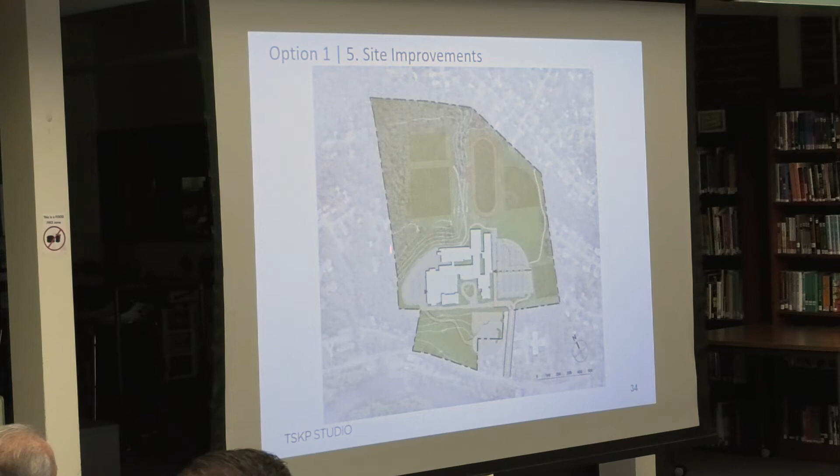Continuing on security, we too felt there was a need to get an additional curb cut onto the site, if only for emergency vehicles, and to create a loop road around the entire building. Right now there's a pinch point behind the Tech Ed and Science Wing as the hill comes down, so we moved some of the water service and regraded that area. So this would be a gated area at the end of this town road spur that emergency vehicles could use to access the fields or to get around the entire site, the buildings if needed.

There are accessibility improvements to this road here and a path to the press box here to make those ADA compliant. The all-in number for the site work, because the cost you're looking at, is all of our alternates added together.

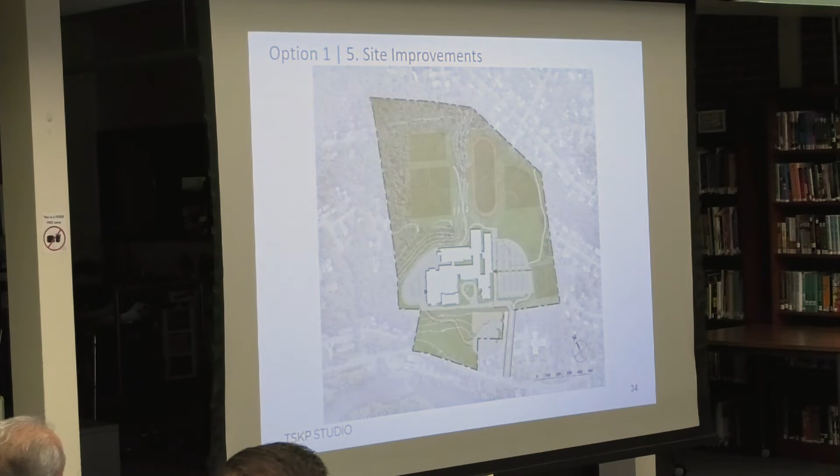This adds a road from the library parking lot, which is about halfway up the hill, to the bus drop-off. And this, rather than occasional or construction access, would be a full-time permanent road to be used specifically early in the morning when the library is closed, to give the buses more queuing space, and in the early afternoon before the library is really packed with elementary students or high school students, to take that surge off of the pinch point you have here between students trying to leave the site in cars and leave in buses.

So from a site improvement standpoint, the money that we spent here, we feel we spent well, or Richard felt we spent well. And he gave me all fours on this. So this is my opinion. I'm like his star student this quarter. I'm very excited.

But all kidding aside, we addressed the traffic flow, the pedestrian safety, and the parking issue. We give you some parking back as part of this. All the athletic fields are 100% accessible. And getting emergency vehicle access to those back fields is an improvement.

Should something happen there. I mentioned the ADA compliance and the ADA improvements to the front of the building. And then the site layout, it's better flow, and it's got some pressure relief valves on you for the pinch points that you encounter in the mornings and the afternoon during your school day.

Benefits to the community. I'm going to talk about this bundle right now: the auditorium, the locker rooms, and the music area. What you see here is the existing condition: gym, the locker room, the music rooms, and the auditorium. I think we're all aware of the inaccessible seating issue, so we're tearing up the entire slab there and pouring a whole new slab through the entire auditorium to make it fully accessible.

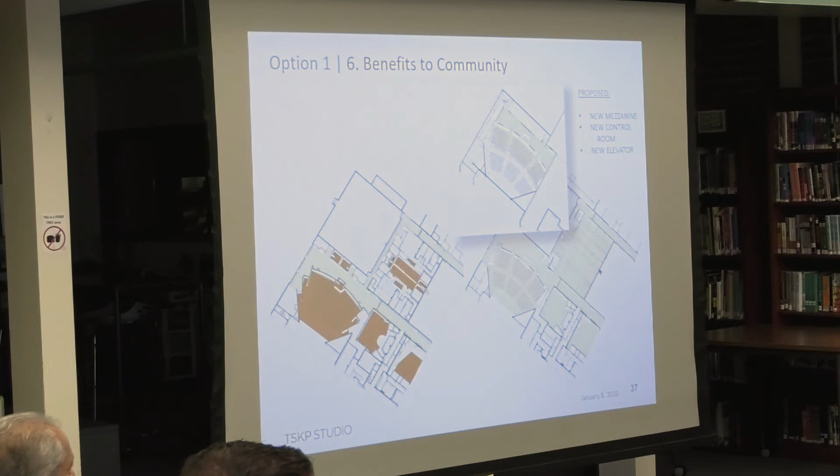I'll just give you a 2 on that. So we improved that score to 2 for the community. And the shelter in place—essentially the generator you have now is the one we replaced for you, and there's no aggregate change as far as using this as a community shelter.

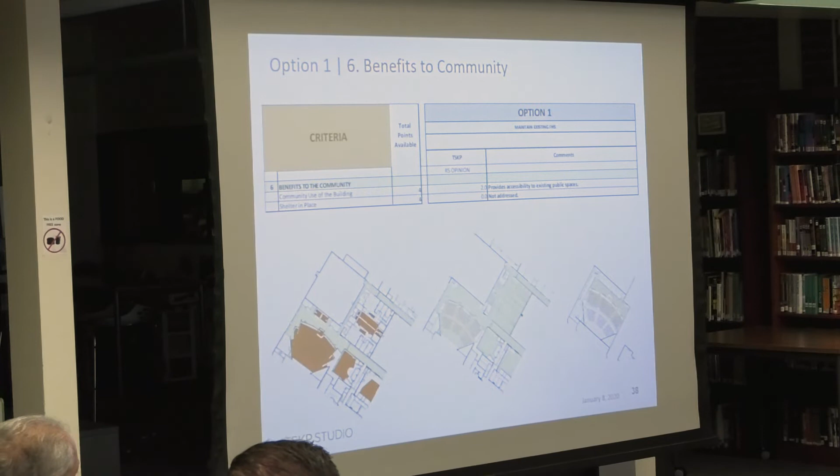The last section here, before we get to cost, is fit and feel for Farmington. This is maybe the most difficult to satisfy in this option, because we're doing so little work transforming the building—really a minimum maintenance project. As far as internal design is concerned, there's really no change, so I gave that a 2.

For exterior design, we are doing significant improvements to that legacy building, the 1928 building. It will preserve this building for generations in the future, so I gave that a 3. But the other areas of the building, the exterior, we're not really improving.

Overall fit and feel for Farmington, I gave that a 3. I think the site gets improved, the 1928 building gets improved, and it's a good example of conservation of resources. Does that fit with Farmington? I think it does. Where I think it falls short is it does not look to the future, it does not create an image for present students about the possibilities ahead. So it's conservative, it's frugal.

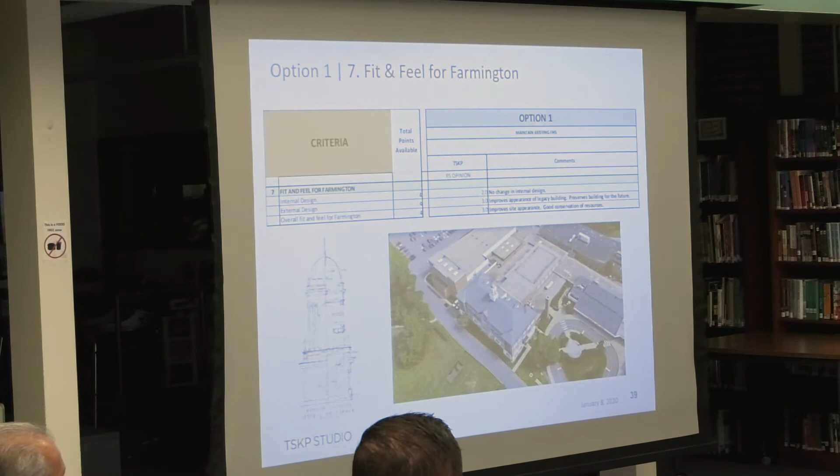It does have a historic element, which there's a great deal of sentiment attached to. And by the way, the complete removal and reconstruction of that cupola is included in that number, because this has been cited as a significant item of interest. So that is included. I gave the overall fit and feel for Farmington a 3, but you may choose to score it differently.